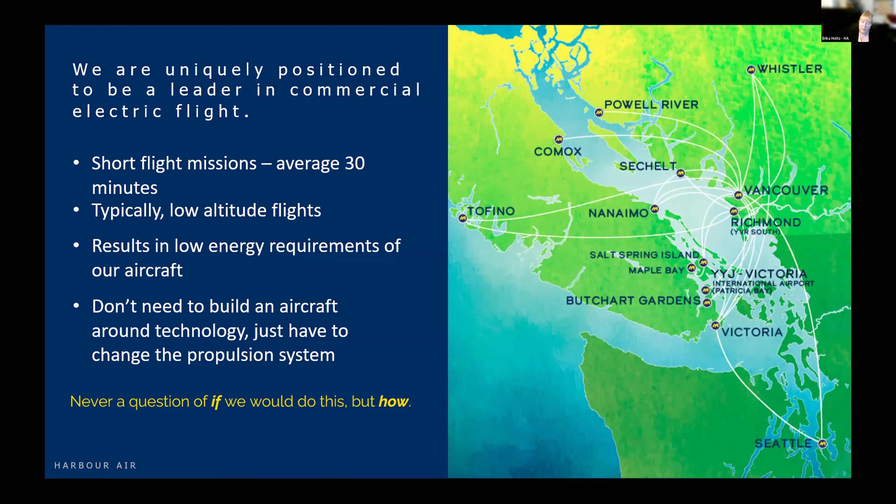We also at Harbour Air have a pretty unique opportunity here because we're an air operator who's been operating these aircraft for 40 years. We understand these aircraft very well, we understand the operational environments. We literally have decades of knowledge on the aircraft type, both flying them and maintaining them. But we also, apart from the air operator certificate, we have our aerospace division, which has an AMO that's been around since the late 80s, a manufacturing department that's been around since the early 2000s, and we're working on our design approval organization. We've had engineering expertise in-house through me and my team, and we're going to formalize it into a design approval organization.

One of the things that was very interesting dealing with magniX back in 2019 was the comment that they could come up with an engineering concept in the morning, and by end of day there'd be a part sitting on their desk for them to install or try out. And that's not something you're always going to have access to. Usually you're either an operator, a maintainer, or an OEM, and we're combining a lot of those skills together, which has given us a very unique opportunity where we are.

So this is the Harbour Air eBeaver. I'm assuming people are fairly familiar with the Beaver itself. It's a 6-seat aircraft, single pilot, has 450 horsepower, and the baseline aircraft is 5,600 pounds gross weight. Our premise on this was to remove only the systems necessary to achieve fully electric flight, and only change anything that was required to make that happen. We wanted to limit the modifications to de-risk the flight testing and path to certification as much as possible. So what you'll see here on the aircraft, externally, the only changes are the pointy nose, and they made us put the ventral fin on. That's not a new mod, it's one that has been accepted in the past for a lot of seaplane operations.

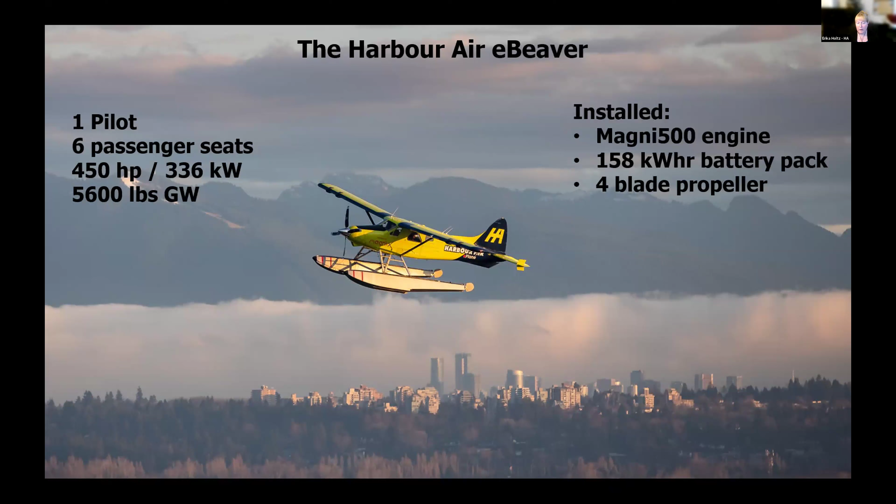We get this question a lot: why the Beaver? There are lots of reasons why it wouldn't work, right? It's an older design, using older, heavier materials. A lot of projects these days are looking at using composites—they're lighter, slipperier surfaces. This is all bumpy rivets design. It flies fundamentally like a snowplow through the air.

But for all those reasons, we could actually turn all those cons into pros with this aircraft. It's got over 70 years of service history. We know this airframe. One of the reasons I like to show this picture—there was an even better one with an ATV, but I couldn't get a copy because it was copyrighted. These aircraft for 29 years operated on an exemption where they could pretty much fly anything you wanted strapped to the floats. Why? Because they could handle it. It didn't bother the airframe.

So we have a very stable aircraft that we can test and ensure, and this led into our risk mitigations—we knew that no matter what went wrong with the powertrain, we could shut it off, glide, and land. And that feeds into a lot of our risk approach. It's a stable airframe, but because it flies like a snowplow, there was significant opportunity for performance improvements, which made it so that from the very first flight, where we said this is proof of concept and engineering, that's very cool, but it's not going to get to commercialization—the performance improvement led to the potential for commercialization.

The other thing that I think was really important was: the ocean is our runway. Float plane, yes, definitely a lot more drag, but from a system safety analysis perspective, I think that was the single most important factor that tipped us over the scale to getting our flight permit with Transport Canada. Because no matter what, we could glide and land, no matter what direction we were heading or where we were in the phase of flight, we could land and get the pilot out safely without impacting any people or structure.

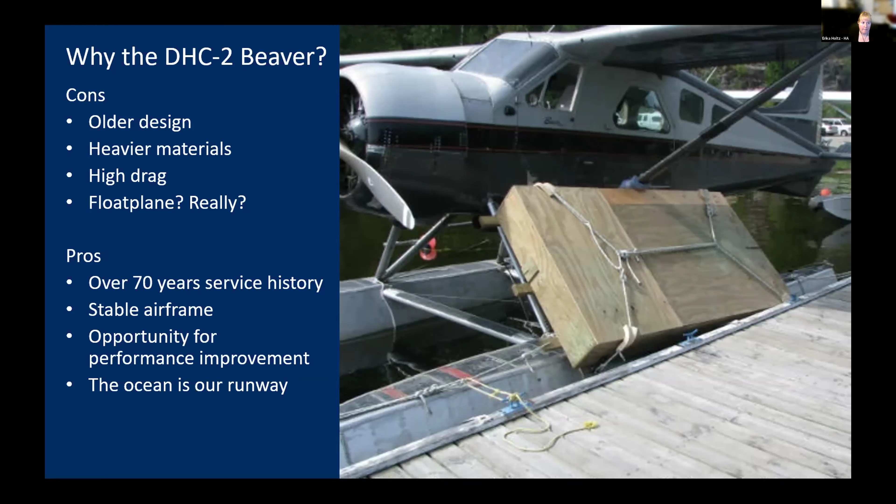So our risk approach was pretty much that. It was very interesting trying to get to first flight. I note the lack of history—this is something that usually OEMs take on, not something a small company or an airline would typically take on. So with me being in the aftermarket Part 23 world, we didn't have a lot of pedigree when it came to developing something of this nature.

We've done—I'm a structural delegate, I do aerodynamics, but I've never done electrical systems. At the time in 2018, when we were told we were doing this, we were not allowed to hire anybody at Harbour Air with that kind of background. We had to make do with the team that we had. So a lot of that work actually got pushed off onto magniX to make sure the power electronics and electrical engineering side of it was taken care of. But fundamentally, we were installing software and airborne electronic hardware components that have no certification and did not have complete

system safety analysis or functional hazard analysis. So our very first meeting with Transport Canada, 21 specialists in the room, nobody with any experience with this type of modification or this product. We went around the room and everybody talked about what they thought could possibly go wrong. We created a very restrictive flight envelope, put very significant limitations on the aircraft.

Because we hadn't done any testing, for example, to DO-160, there was very little environmental testing done. We're not allowed to fly into rain, sand, dust, or smoke. We were restricted on wind limitations to ensure we would be able to land on the water, because if it was higher wind, wave action, we might not be able to land. So we had a restricted wind envelope. But what that meant was, as a seaplane operator, it completely reduced the risk.

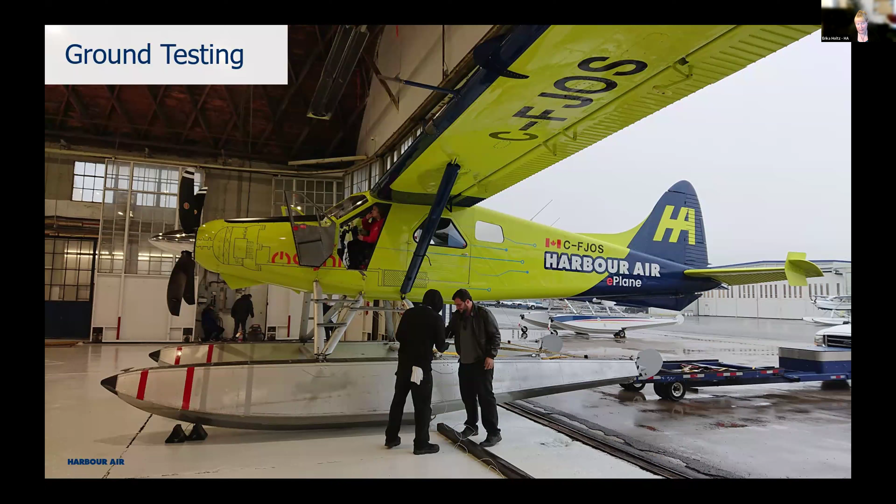At this time it was November, December in Vancouver, so when it rained we stuck the nose inside the hangar. This was an empty hangar, no FOD, very clean, so we could run the simulations this way as well, even when it was rainy out.

That led to our first flight. Since then, we're closing in on 100 flights with the aircraft. When we went to first flight, due to a variety of issues, but fundamentally, every single component we received from our suppliers came in about 10% heavier. By the time we got to first flight, our calculation was that we would get an 8-minute flight. So while the engineering team was excited that we finished the proof of concept and showed that electric aircraft could fly, we did not believe at the time that this would lead to commercialization.

After the first flight, we started doing some initial testing. We did a lot of cruise, range, climb, and takeoff testing. Surprisingly, the performance improvement we got led us to conclude that commercialization was on the horizon for us.

The other thing that's really interesting is we get to do testing whenever magniX, like the loss of power control situation that came up, we were able to do simulations with this aircraft to determine whether we would maintain level flight if we had a power loss. It's nice to have that experimental aspect, so anytime our major component suppliers, like the engine or battery makers, want us to simulate something, we can do that in the real world environment.

I want to make this note because a couple people have asked. This is company data, not validation data. When we first put this together and calculated an 8-minute flight, I wasn't going to spend thousands of dollars on flight instrumentation to be within 0.01% of the number when I wasn't even sure we'd get to commercialization. So a lot of this we did as company data. They are calibrated instruments, just not at the same level as validation instrumentation. We really wanted to gather company data for determination of viability - we weren't trying to get this product to certification anymore, we were trying to understand if it was worth it to pursue certification.

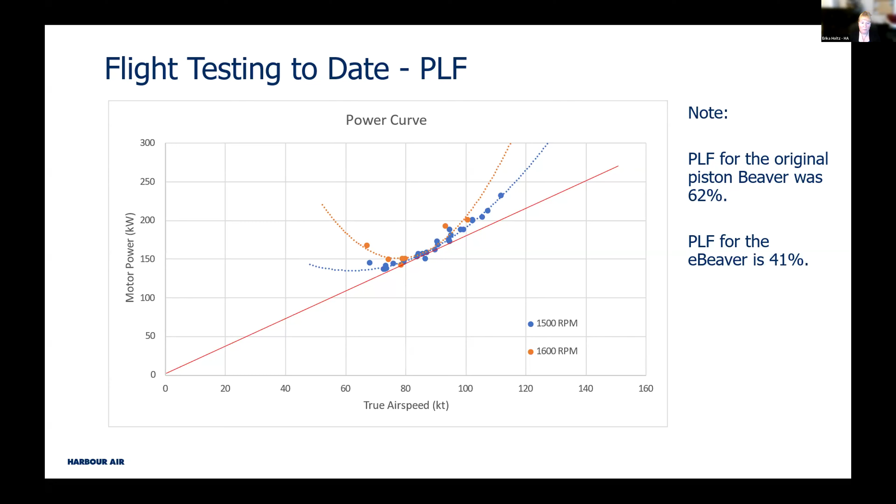This one's just fun, because anybody who's flown a Beaver at 5,600 pounds when it's warmer than 15 degrees out knows it does not like to climb. I don't even know if it meets the balked landing climb requirement of 3%, likely not — it wasn't a requirement for a B-car aircraft back then. But we are getting nearly double the required climb gradient at 80% power. We're getting 14% climb gradient with this thing, and that's because of the reduction in drag primarily, and the improvement in the efficiency of the propeller.

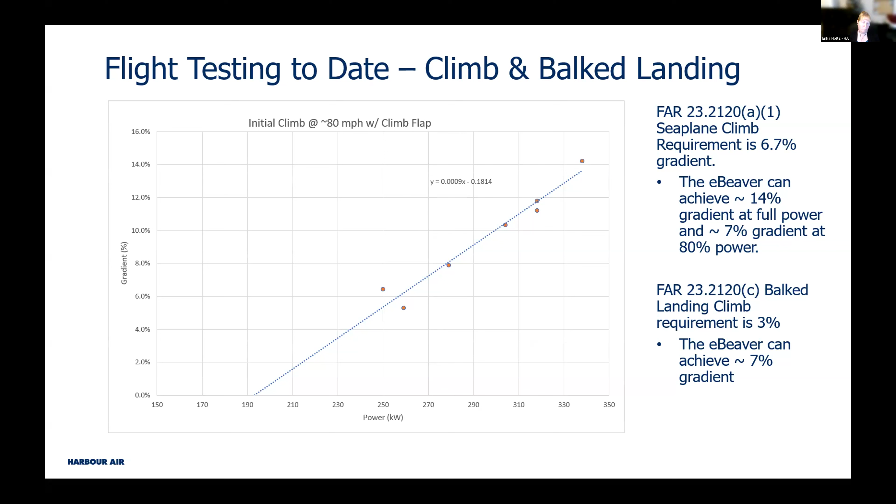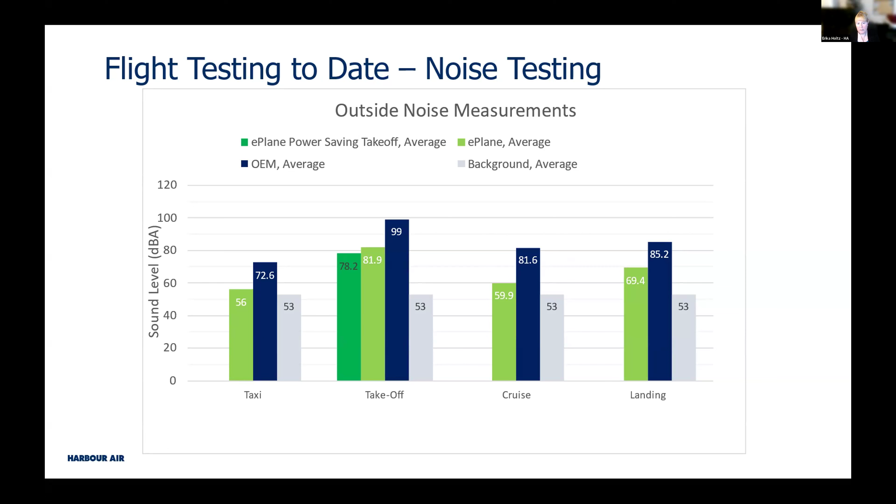Noise is a big issue for us as well. Anybody working in an urban environment, I know a lot of you guys will probably be paying a lot of attention to this — you're probably a lot quieter than we are, even with the improvements we had. But for us, we've seen across the board approximately a 20 decibel reduction. We still get quite a bit of noise from the prop, but we've reduced the speed of the prop and reduced the diameter of the prop, so with the tip speed less, we are getting significantly less noise.

We were able to test this also because we have an air operator certificate and we have our scheduled points. We were able to take the aircraft and test it out in a couple of different areas. We took it from Richmond over to Salt Spring to Victoria. We've taken it downtown, really to test it under those operational conditions.

What does that look like? It really led to the charging infrastructure — that's one of my lessons learned. It's going to be a real problem.

One thing that's also interesting with this aircraft — usually with an experimental aircraft you have the right seat available for your flight test engineer. Unfortunately for us, as I said, all the components came in 10% heavier. There was one component that came in about 5 times larger and 5 times heavier than it should have been, and it ended up being the co-pilot. That was our battery management unit. So there was no room in the aircraft for any of our flight test engineers or essential crew to go on board. So every time we sent the aircraft out, we chased it with our Cessna 180.

So I have a short video here to show you. This is me hanging out of the Cessna 180 with the window open with a video camera so that we could take some footage of the aircraft flying, with Mount Baker in the background there.

It's very windy. It's very hard to hold that thing steady while leaning out the window.

All right, so from that, lessons learned: charging. Around the world, power source being carbon-free is going to be an issue for us in BC. 98% of our power from BC Hydro is hydroelectric, so we have a very clean power source, but not everybody's going to have that. The charging protocol standardization — I know there are groups working on this, but it is definitely going to be interesting. Like we're CCS1 here, Europe is CCS2.

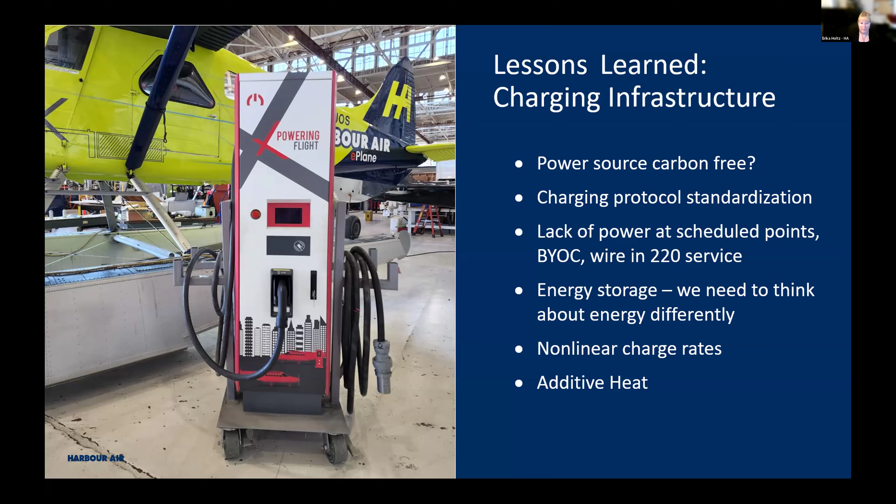The other thing with thermal management that I find really interesting is that there are temperature differentials, and I think that was a bit of a surprise to us, just how influential the environment actually was on the battery packs. When we were charging in downtown Vancouver, it was about 12 degrees Celsius out, but the water temperature is really quite cold. So when we set it up to charge on the water, the heat sink was so significant that we were getting an 8-degree temperature differential between the cell at the bottom and the cell at the top in the same module - 8 degrees Celsius temperature differential.

And then of course there was a greater spread when you looked at the modules that were in the front or in the back. And if you're able to keep your battery pack all in one, I still think you're going to see temperature differentials from your outside modules to your inside modules. It's not something I think we spent a lot of time understanding, and again, I think that's going to have to be managed through that ground conditioning system.

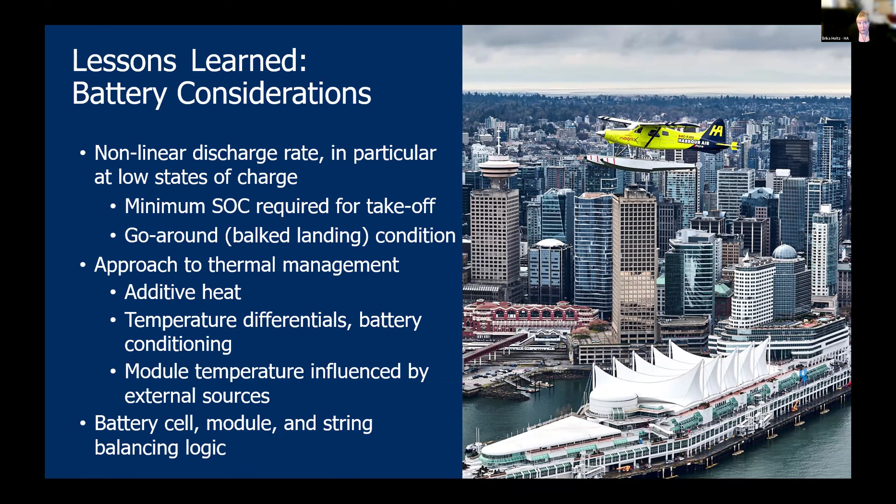Also, battery cell module string balancing logic - we ran into some interesting issues there, mostly to do with battery suppliers not understanding operations. So they don't necessarily tell you everything you need to know, and you don't even know the questions to ask. So that one can be interesting.

Safety and training, aircraft operations on water - these are still questions we're trying to understand. I know the electric vehicle market, a lot of the vehicles will do submersion testing of their battery system, but I have yet to find any kind of specification that looks at the entire powertrain. What if your entire engine and battery system were submerged while it was energized? We're working with the NRC a bit to try and understand that better.

And emergency response - one of the interesting things I saw at one of the ASTM conferences, they had some automobile rescue charts, the ISO 17840. I think this would be something really good for us to develop for the electric aircraft market, so that when emergency response is approaching, they'll have a quick reference sheet showing them where the high voltage lines are, where the batteries are, where the go and no-go zones are, and the best place to hook up the water to try and flood the system.

Exactly, and design the access to the batteries to ensure the water—because if you're just spraying it on the outside of the aircraft, you're not necessarily getting into where the battery compartment is, where the cooling is desperately needed.

So flight testing near term, this is what we're going to be doing over the next couple of months. We are going to do some more accurate validation, because we want to see if we can demonstrate the stall. So we're going to do position error correction, some stall demonstration comparison to baseline, because a lot of the subpart B requirements are based on the stall. So if we can prove it didn't change, we might be able to make some claims of no change in some of those areas.

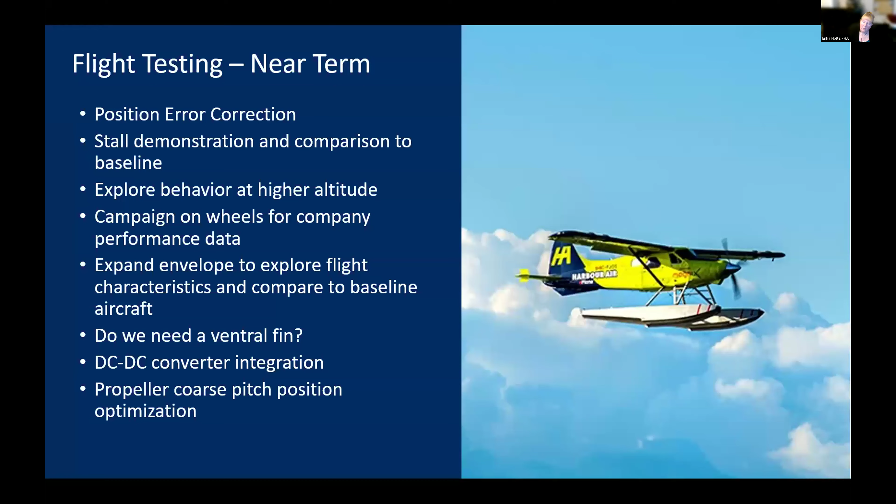So commercialization steps: we signed a letter of intent with magniX earlier this year to purchase 50 engines. We're trying to secure the supply chain. It's intended for our fleet, but also third-party operators. So interestingly, we've talked with some operators around the world. There's some people in New Zealand who operate in remote communities and don't always have access to fuel. They're interested in these sort of short hops, connecting islands similar to what we're doing.

The other use case that's kind of interesting is in Europe. They have a lot of skydive operations, and their sport is under threat right now because it's recreational and it's burning gas. So they're looking for electric aircraft to help bring into their fleets so they can show they're trying to move towards a sustainable future to save their industry.

Our initial STC target—we're hoping for 2026, but that's likely not our commercialization aircraft necessarily at the time. The commercial aircraft will likely be ready in 2027 because we'll probably have to upgrade the batteries. And we're continuing to sign LOIs with potential customers just so we can show that there is a market for this aircraft out there.

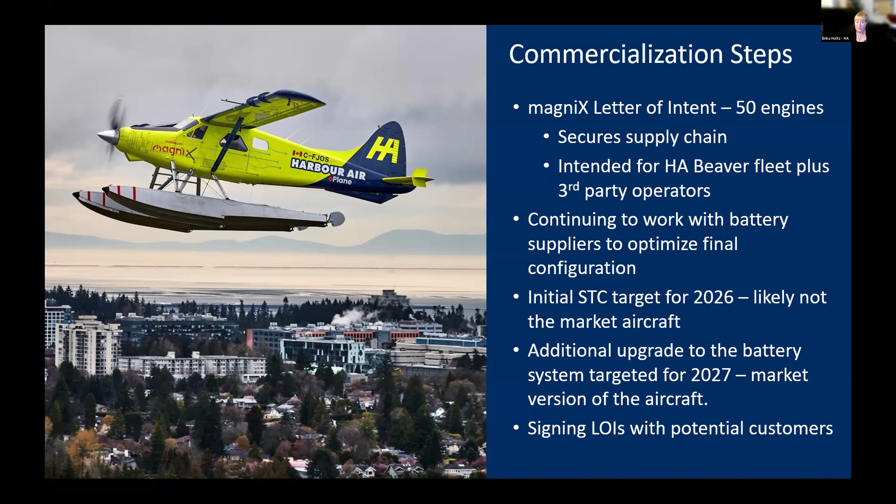Our expected performance of the commercial aircraft: anticipate a 60-minute mission with 2 to 3 passengers for first STC issuance, which would not be the commercial version, but 4 to 6 passengers for the subsequent iteration with the replacement batteries.

We're trying to make sure the cockpit interface is as close to the original that the pilots are used to. Pilots aren't big on change, so we're trying to design for as little change as necessary. So the throttle quadrant—although they'll lose the mixture lever, they'll still have 2 levers that feel very much the same as before. It'll have a new screen for the engine instrumentation, but a lot of the other stuff we're leaving the way it was.

And we are going to make sure it has reversing capability. Our larger aircraft do have that right now, but the Beaver has traditionally never had reversing capabilities. We've been requested by our operator to include that.